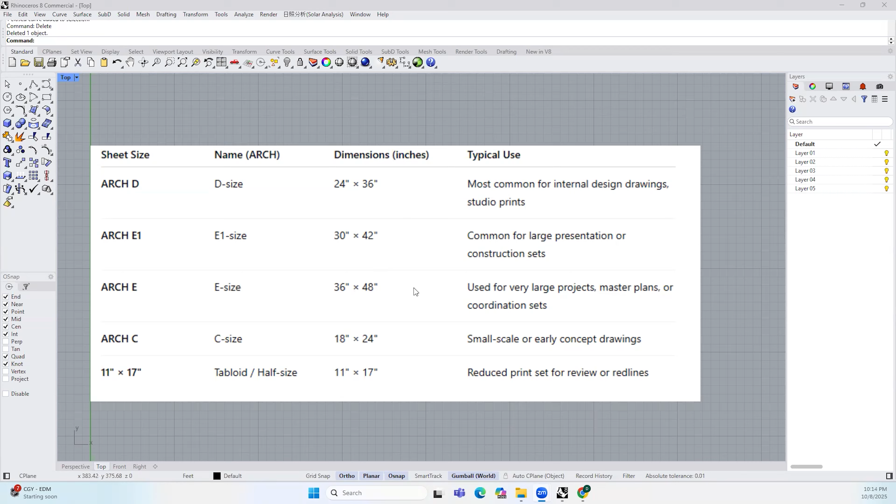Today I want to show you how to print to scale in Rhino. In all the previous projects I worked on in firm, we used 36 by 48 inch paper. In most studio projects, we used 11 by 17 or letter size because smaller printers can handle them. Today we are going to try to print this rectangle to scale using 11 by 17 paper.

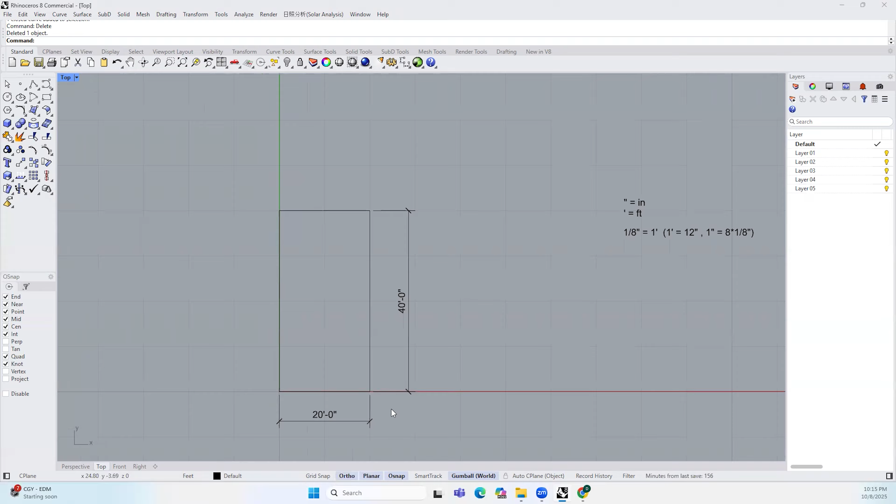First we check the unit. It says feet, and that's good because we created this rectangle in another tutorial using feet. It's 20 feet wide and 40 feet tall, and I want to print it on a piece of paper that is 11 by 17.

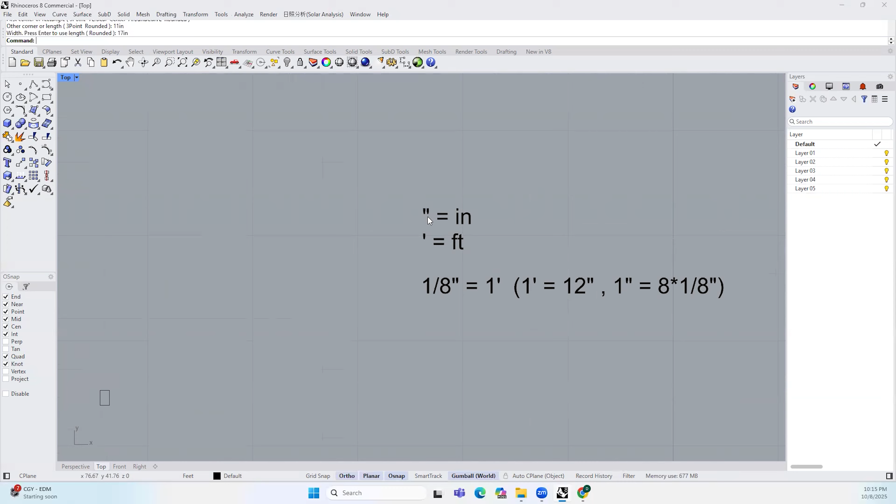First I want to type REC and click anywhere, then type 11 inch, hit space, type 17 inch, hit space. You can type inch using the letters, or use a double quotation mark for inch. You can use a single quotation mark for feet.

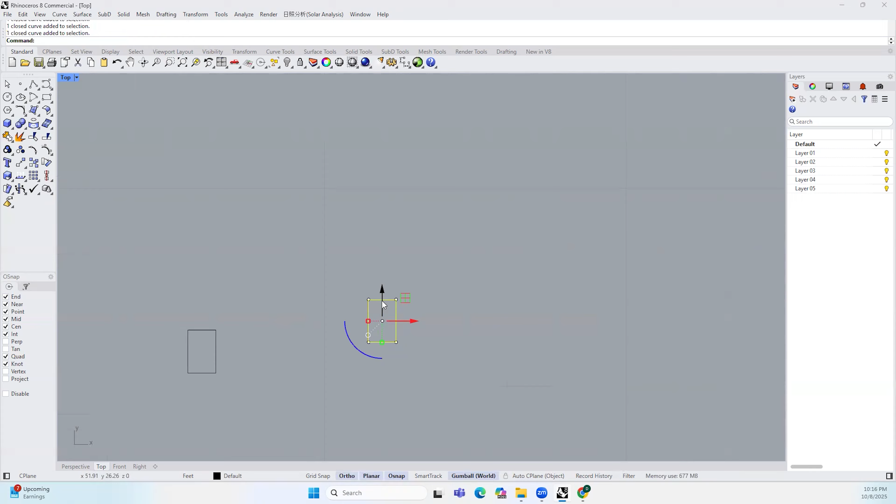If I type REC again, click here, type 11 double quotation mark for inch, hit space, then type 1 foot using single quotation mark, then type 5 inches, hit space. We have created two rectangles that are exactly the same size using different typing methods.

Then I want to scale this paper up. Before I do that, I want to check our printing scale. We are choosing 1/8 of an inch equals a foot.

So what does that mean, 1/8 of an inch equals a foot? Let's look at the math. 1 foot equals 12 inches, and 1 inch equals 8 times 1/8 of an inch. So 1 inch is 8 times the size of 1/8 of an inch. And 1 foot is 12 times 1 inch. So using this scale, we are literally scaling this thing up 12 times 8 times, meaning we are scaling it up 96 times.

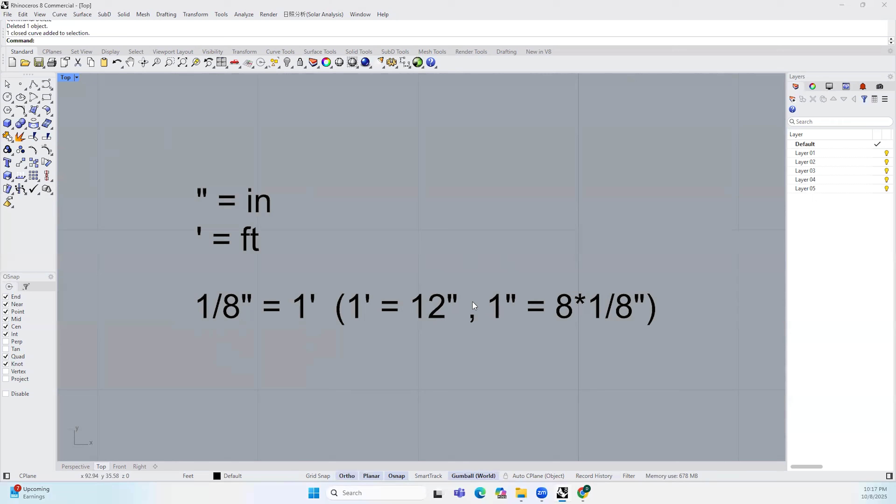So in order to print it to scale, I can select this paper, click here, type in 96, then click here and type 96 on the other direction. So we have scaled this paper up 96 times on both X and Y directions.

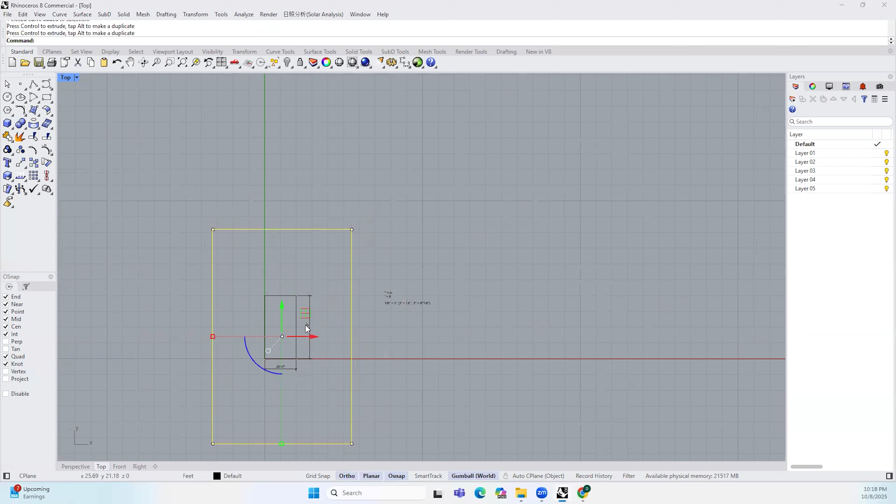Then I will move this around to make sure I have all my stuff in the center of this paper. Then I hit Control P, make sure I've selected the image file, which is PNG, BMP, or TIFF, and set the width and height to exactly the same size as our target paper - 11 by 17 inches.

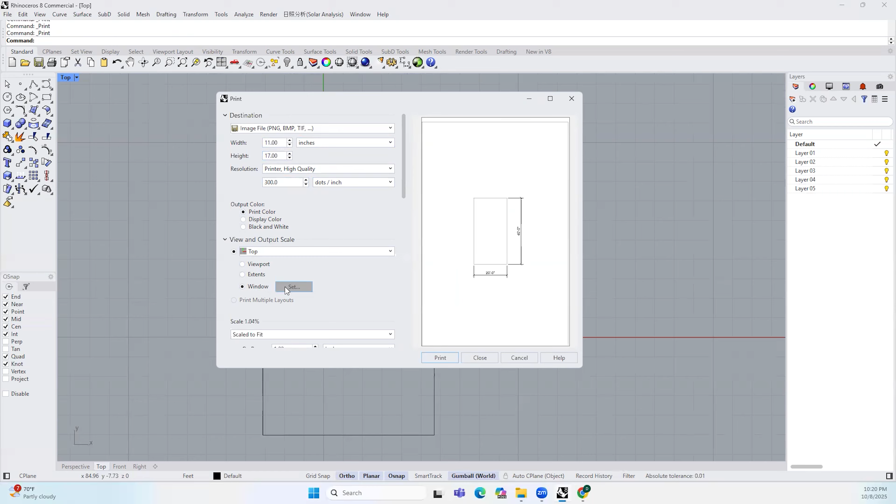For resolution, I will use the minimum 300 dpi, meaning every inch we have 300 pixels. I will choose print color, make sure I'm using the window, and click set. I will set the window from that corner to this corner and hit OK.

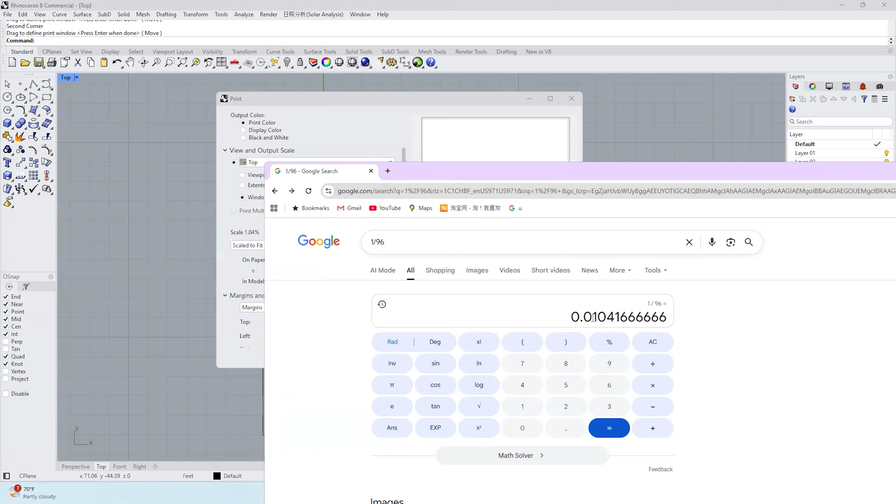I realized the system changed the scale to 1.04%. What does that mean? That's because if you calculate 1 divided by 96, you get 0.0104166. If you multiply that by 100, you get 1.04%. That's how we get this number - this thing has been scaled down to 1.04% of its original size.

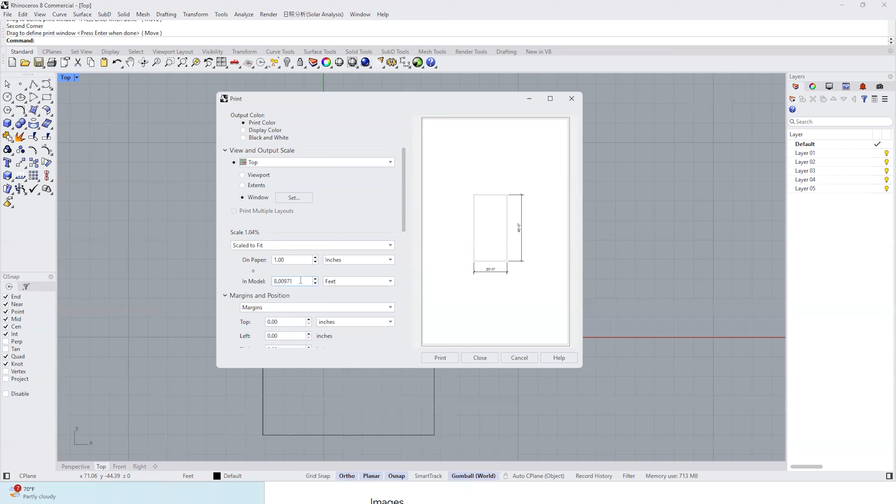Let's look at those values here. It says on paper, 1 inch equals in model 8.00971 feet. That's almost perfect because our goal is 1/8 of an inch equals a foot, and now it says 1 inch equals almost exactly 8 feet. There's a small difference because when we were drawing this rectangle for the set window, we cannot draw it perfectly - that's just a problem with Rhino.

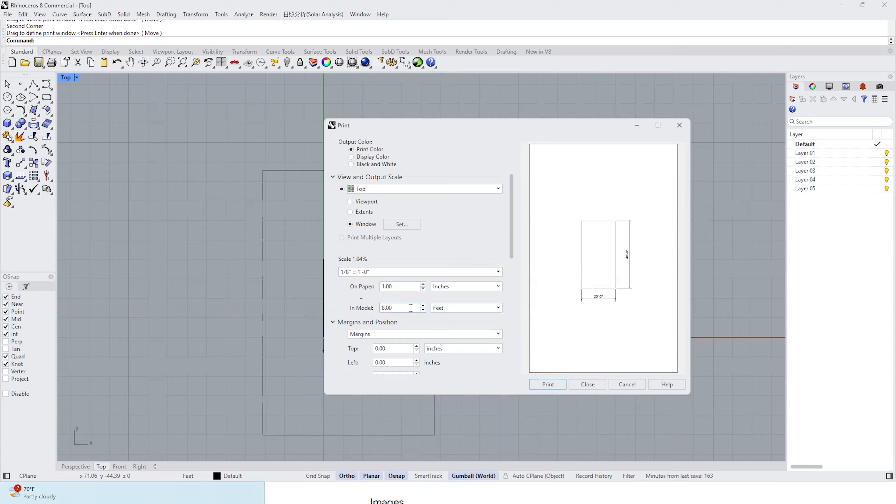To fix that, I can click here and choose 1/8 of an inch equals a foot. We have it here, or we can just type it in. Then I will hit print and replace this number.

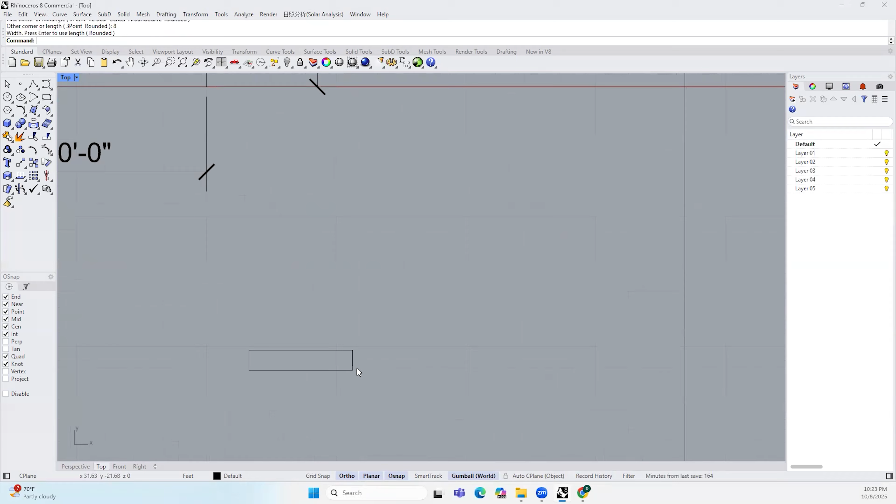Let's take a look at that drawing - this is what we have created. Looking at this paper, I don't really know if this is on scale. So I can come back here, type REC, click anywhere, type 8, type space, and click here. We have created a rectangle that is 8 feet wide. I can dimension it from this point to this point - it is exactly 8 feet.

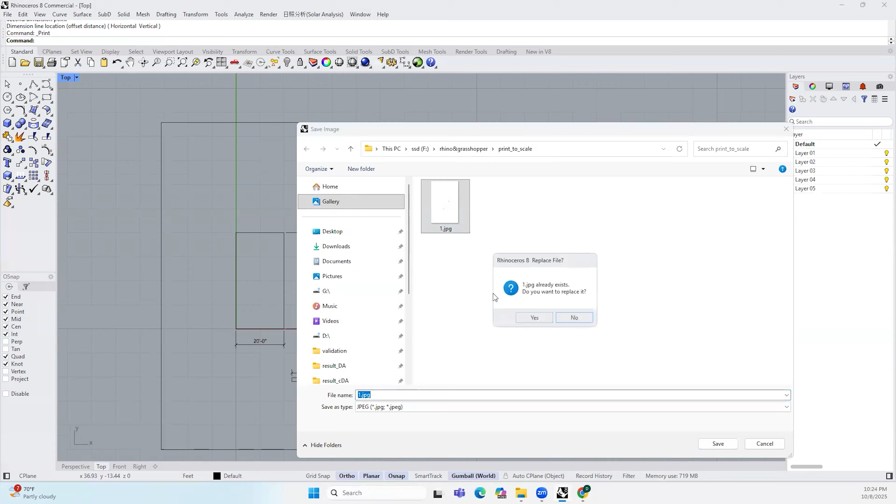On paper, this should be exactly 1 inch because our target is to scale this to 1/8 of an inch equals a foot. So 1 inch should equal 8 feet. I will hit print again, replace this one, right click it, and open with Photoshop.

In Photoshop, you will see this is what we got. In the ruler here, you'll realize this is 11 and this is 17. That is exactly what we want.

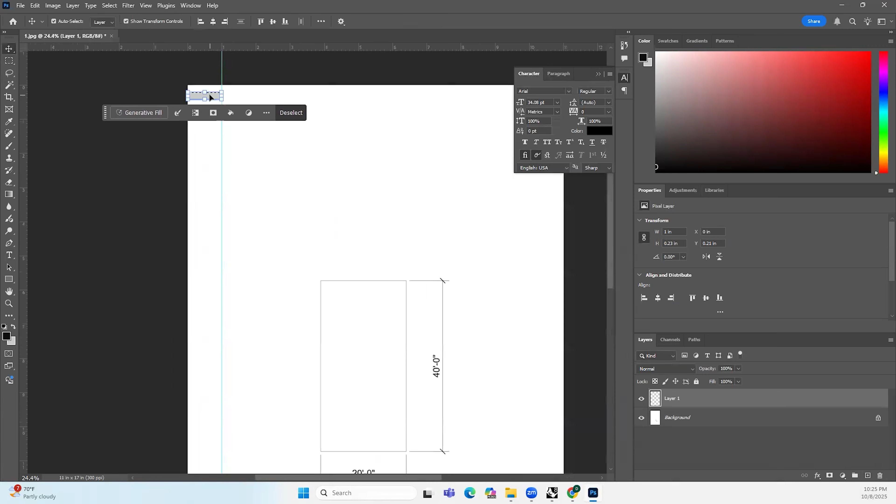I will draw a guide here to 1 inch, draw a rectangle here, and move it to that location. Now I realize this rectangle I created in Rhino, which should be 8 feet wide, is exactly an inch wide in Photoshop. That means we have done it successfully - we have exported this image in the perfect scale.

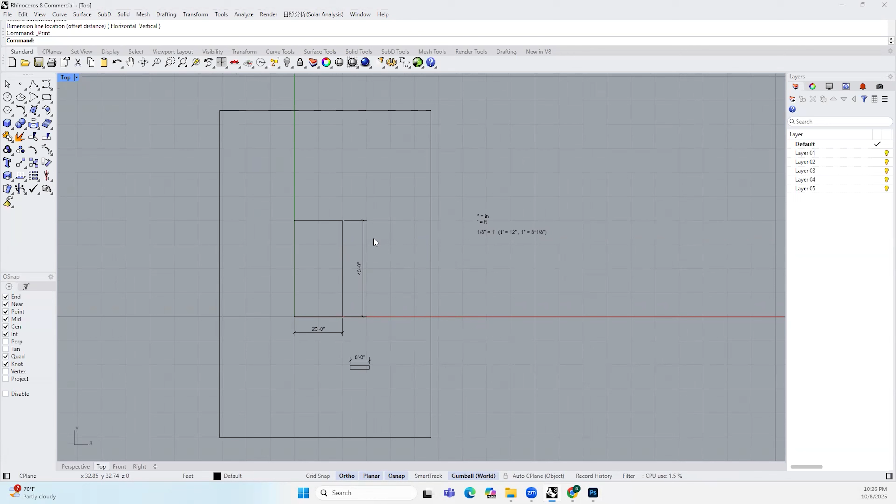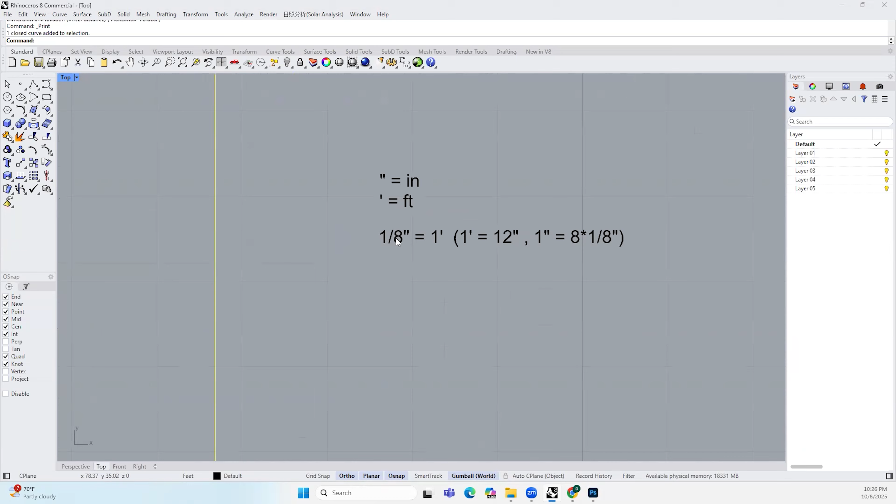This is super useful, not just in drawing, but also when you want to create a 3D model. For example, if you want to create a 3D model in 1/8 of an inch equals a foot scale, you can draw those templates using this method and print the paper out. Cover this paper on whatever material you want, like chipboard or museum board, glue it to the board, and cut this rectangle or whatever shape you're drawing in Rhino. Then you have created a physical model exactly in this scale, which is 1/8 of an inch equals a foot.